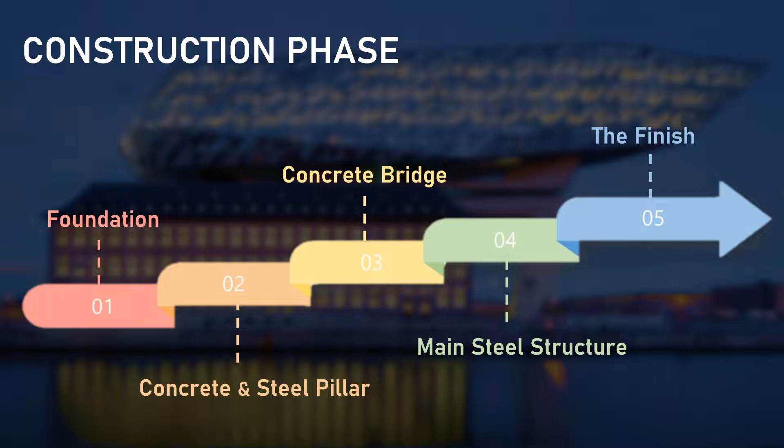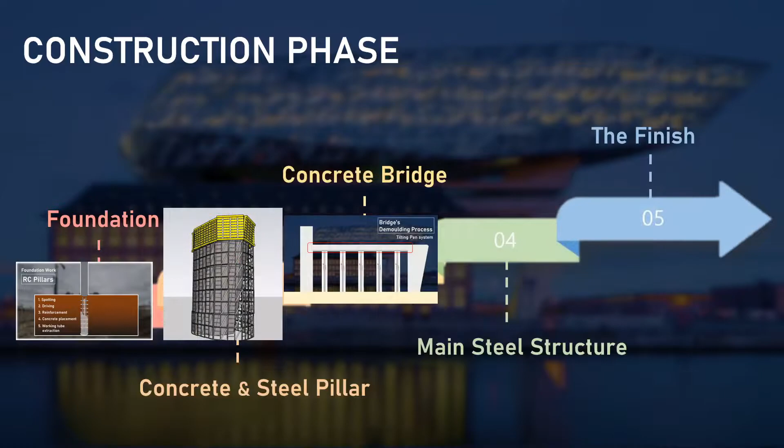Until today's video, we have covered most of the construction process of our building, Antwerp Port House, going all the way from the bottom to the highest point. Today we will go over the last process, the finish of Antwerp Port House, including its flooring and facade design and system.

First, let us go through how the floor was constructed in our main superstructure that floats above the ground. Before constructing the floor, there were three main challenges the contractor had to face, as the 1,500 tons of superstructure is floating above the ground with only a few pillars supporting its weight. To solve these challenges, the contractor focused on light weight, being free of temporary propping, and speed and ease of construction.

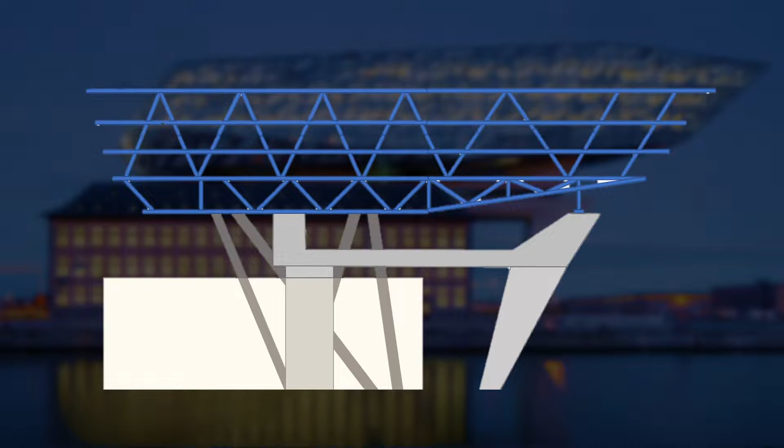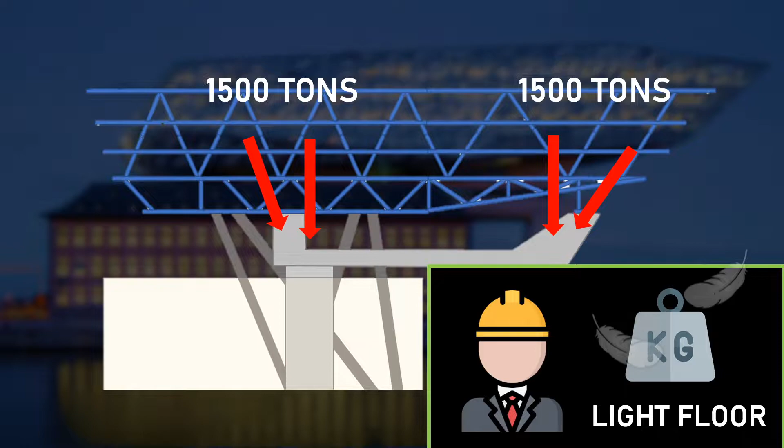As the superstructure itself was already a heavy structure, the contractor focused on using floor panels with low floor self-weight, which was important to limit the weight of the new building floating above the existing building.

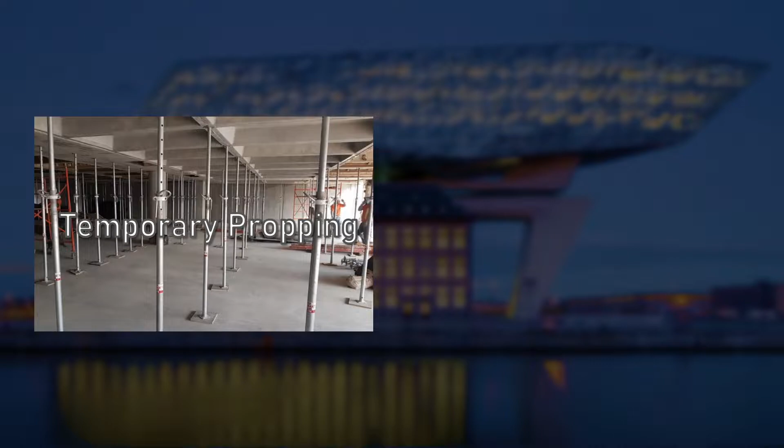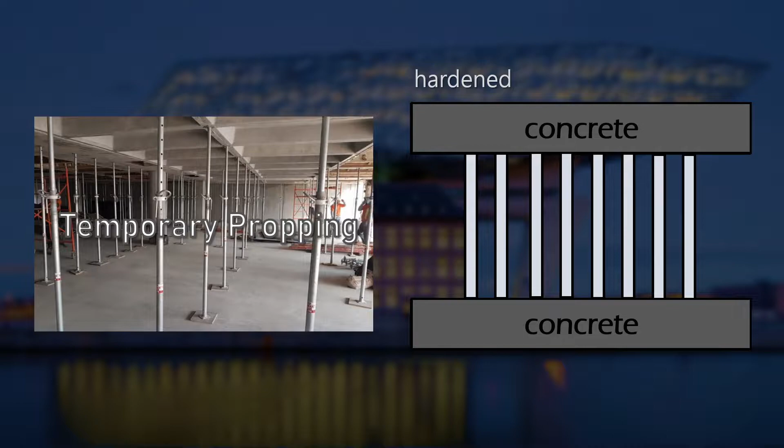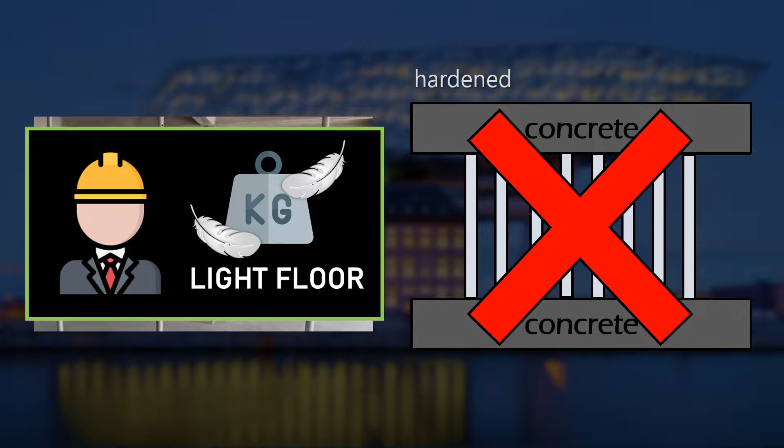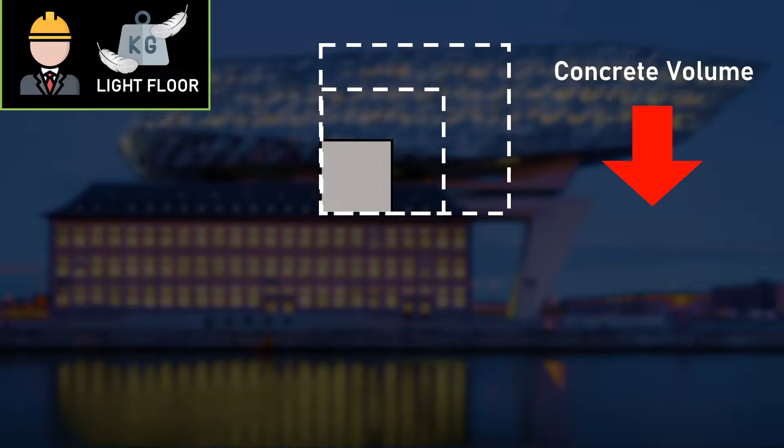In the process of creating a floor, temporary propping is used to properly shape the floor and support the concrete until it hardens. However, the contractor wanted to reduce unnecessary weight in constructing the floor. Therefore, they looked for floor panels that could achieve long spans and load requirements with no need for temporary propping. Finally, the contractor searched for a flooring system with low concrete volume, speed of construction, and high simplicity. All three elements focused on spending the lowest amount of weight possible in the flooring.

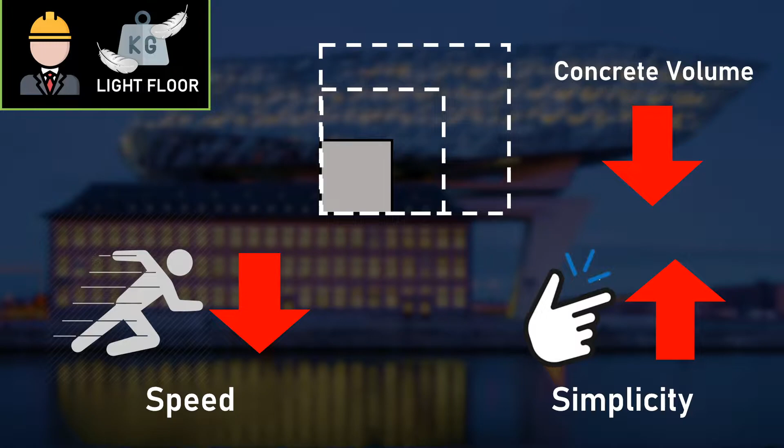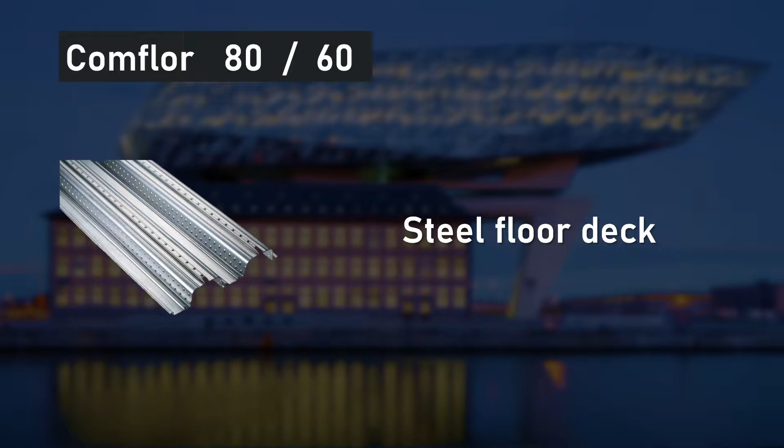To satisfy all three elements, Tata Steel Construction Company's ComFlor 80 and 60 were the perfect composite floor deck systems. These are the steel floor decks used in flooring in the Antwerp Port House, and the number at the end of the name represents the depth in millimeters of the trapezoidal profile, which gives an ability for long spans.

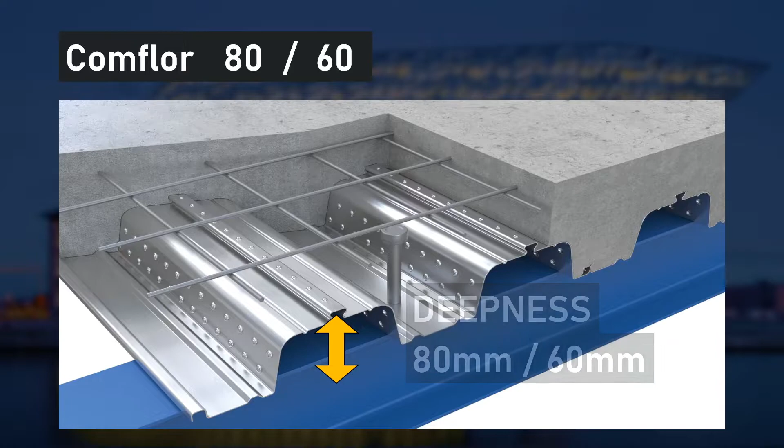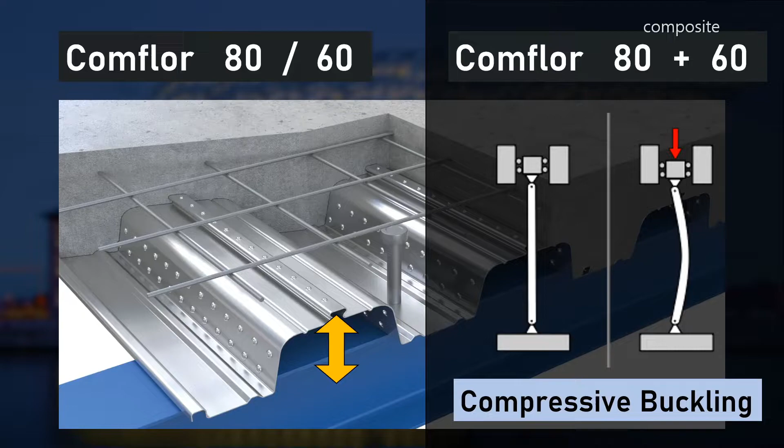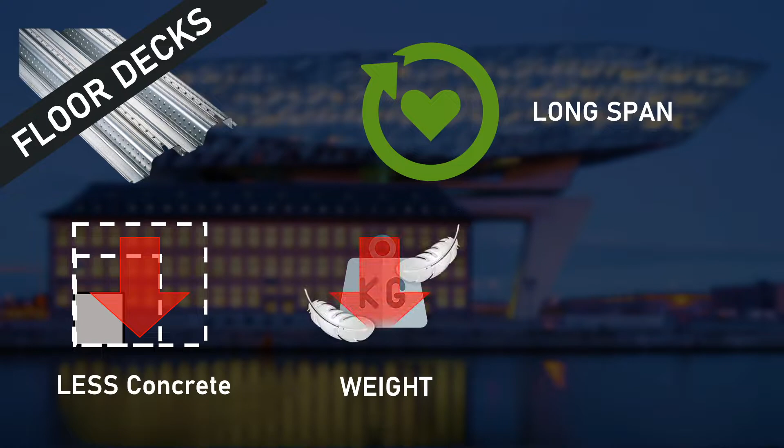Using these two composite floor deck systems, there is exceptional resistance to compressive buckling that could be created by the concrete, reducing the number of secondary beams needed to hold the deck. Through these two floor decks, the contractor of Antwerp Port House was able to solve challenges with benefits including long span, low concrete usage, low weight of the deck itself, and fewer beams needed to support the decks.

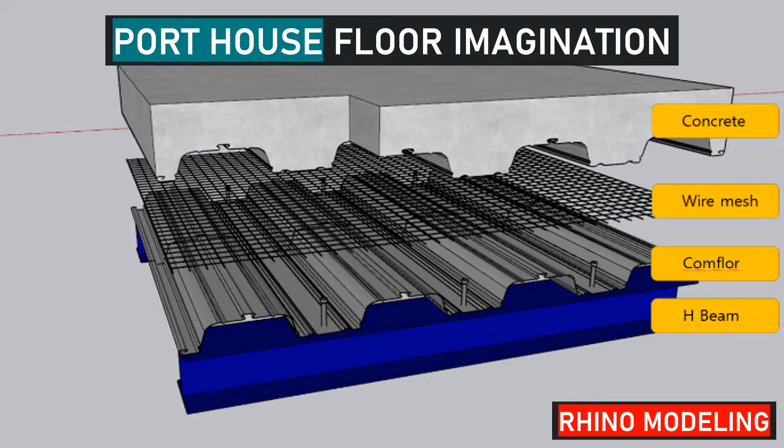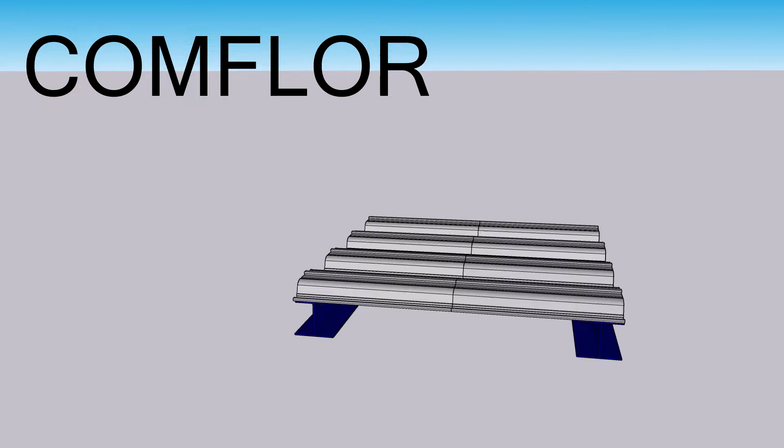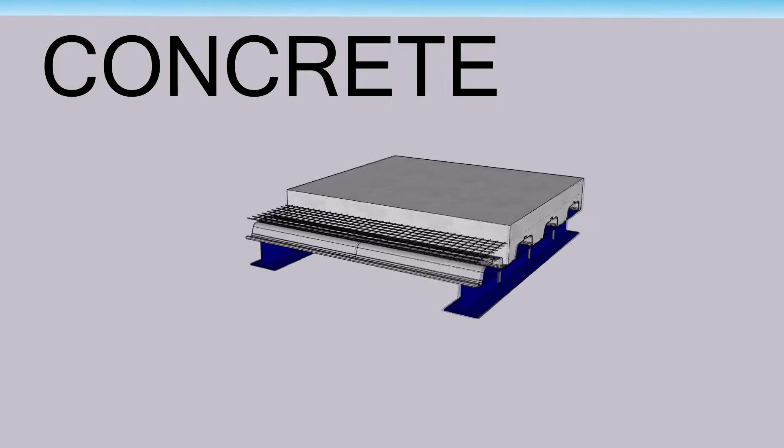This is the image we designed showing how the floor of Antwerp Port House is composed: ComFlor, wire mesh, and concrete, with an H-beam below. ComFlor is placed above the H-beam, pinned with a shear connector. Then wire mesh, which is steel, is placed above the ComFlor for reinforcement. Concrete is then poured, creating a reinforced concrete floor panel. This process is followed on each floor for the whole superstructure.

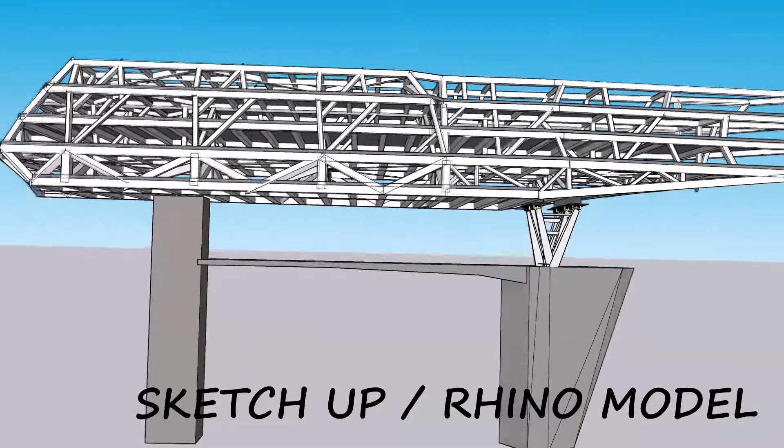Till now, we have covered how floor construction took place in our building, Antwerp Porthouse. Now we will go over how the facade was constructed.

Every side of the superstructure is covered with glass panels. The extreme geometries and parametric detailing of the structure have created aesthetic factors in Hadid's work, pointing due south toward the city's historic riverside and center. It seems both frozen in motion and surging forward.

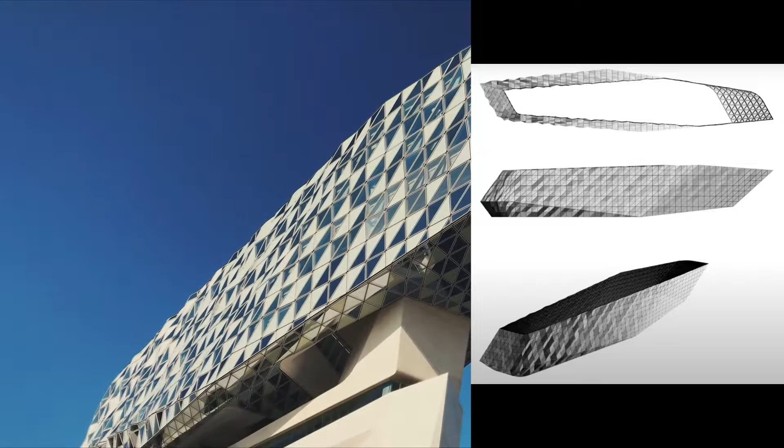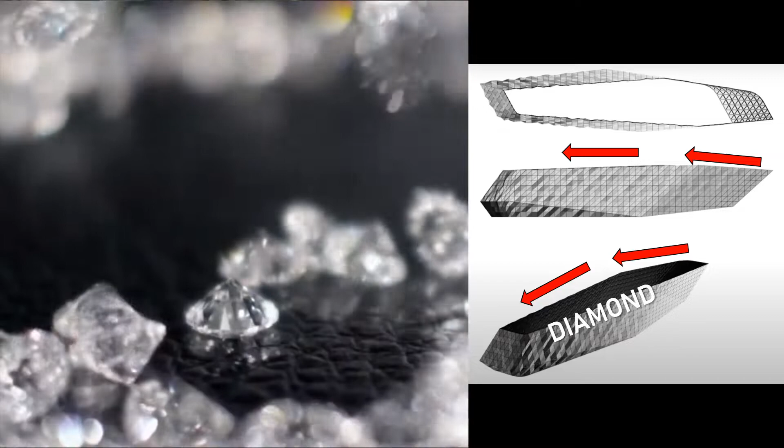The top's triangulated glazed cladding starts off flush at the prow but erupts into irregular projections, becoming increasingly crystalline along its length, a reference to Antwerp's famous diamond trade. The extension is covered in triangular facets, some transparent and others with a rippling texture that echoes the water to the north.

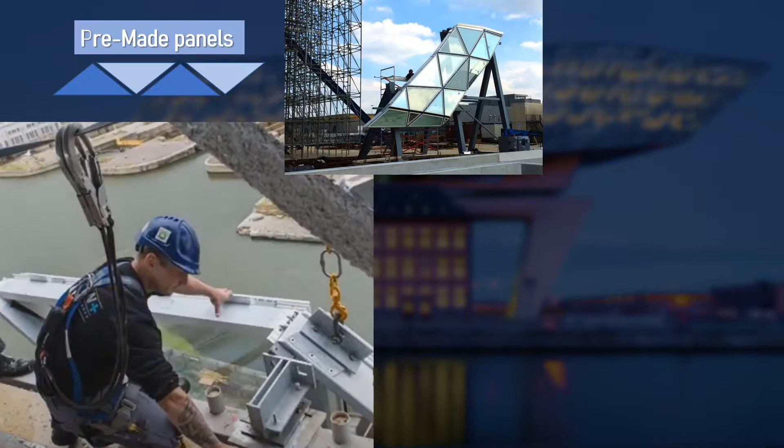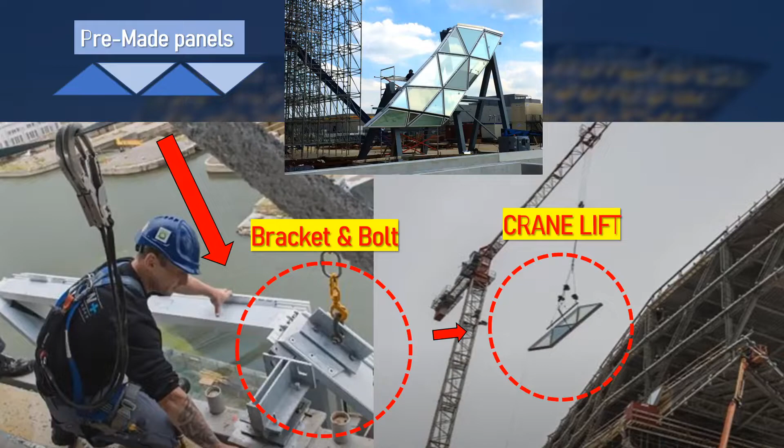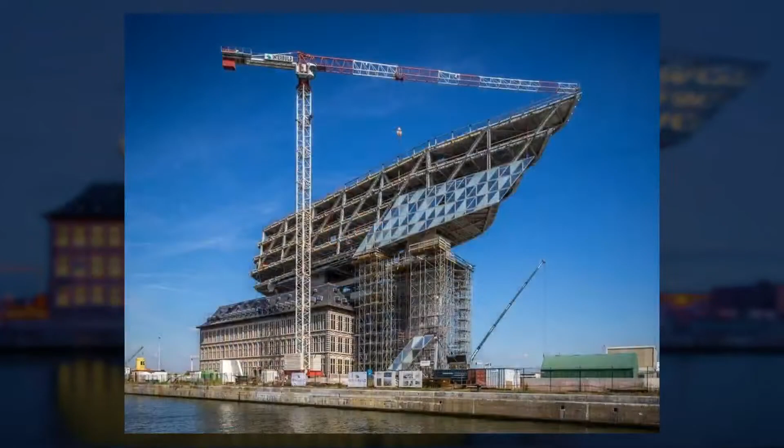Workers of the Antwerp Porthouse installed pre-made glass panels at the construction site, connecting them to the superstructure with bracket and bolt elements. Separate triangle panels were connected in a bundle with the same method and lifted to the superstructure's outer wall by a crane. By this method, the superstructure's outer wall was completely filled with glass panels from forward to backward.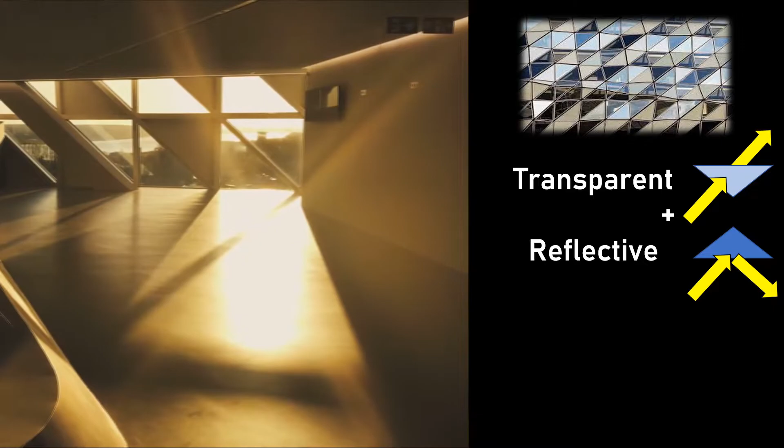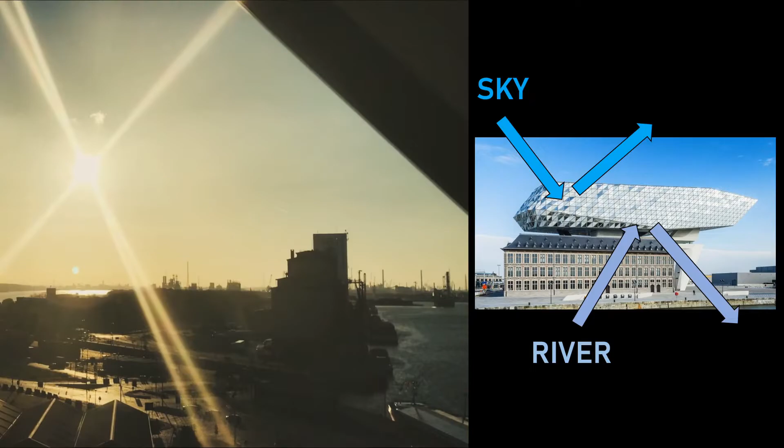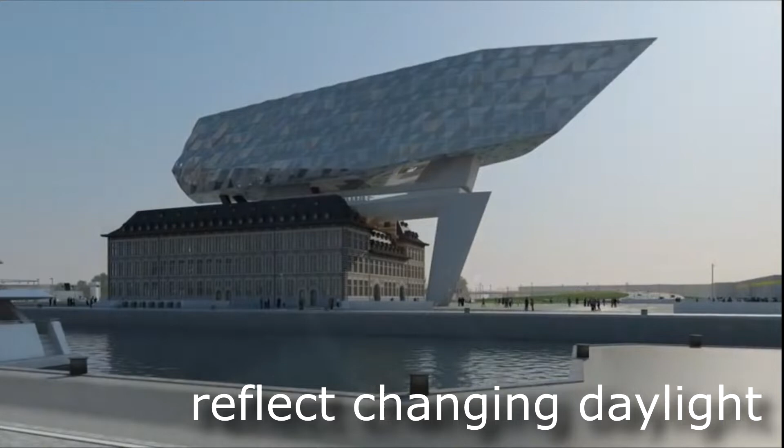The facade panels of the building contain a mix of transparent and reflective glass triangles. The alternating transparent and opaque panels are intended to visually break up the scale of the structure. They also provide ample daylight, shade, and views out to the Scheldt River, city, and port for workers. The new extension appears as a carefully cut form which changes its appearance with the shifting intensity of daylight. Like the ripples on the surface of the water in the surrounding port, the new facade reflects changing light conditions.

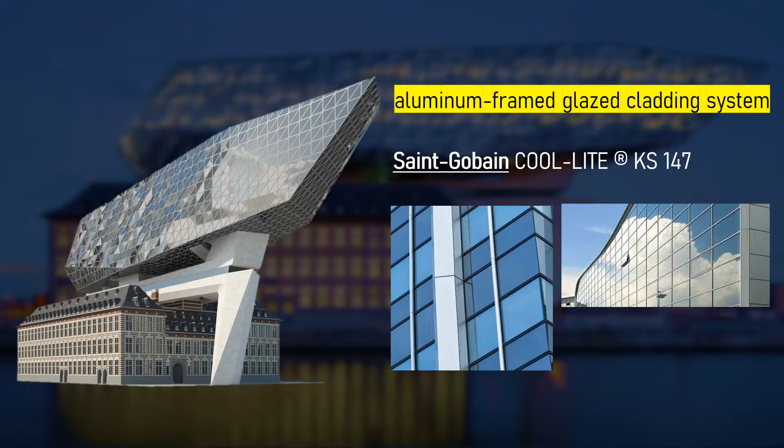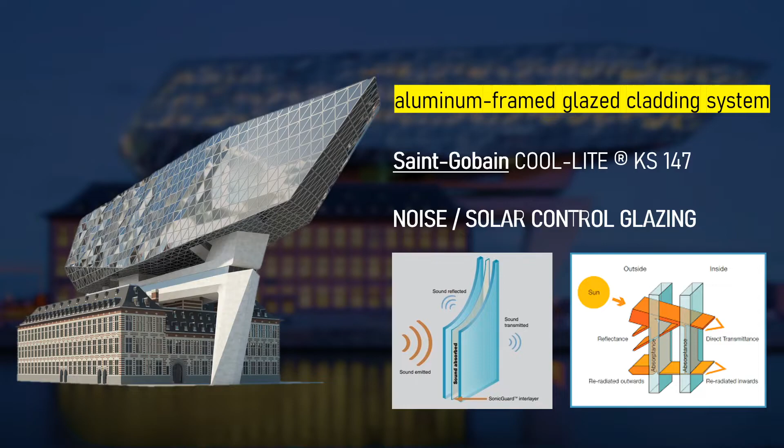The superstructure is wrapped in an aluminum-framed glazed cladding system, which reduces solar gain. The facade of the new extension consists of Saint-Gobain COOL-LITE KS 147 glazing. This modern noise control glazing keeps intrusive noise out, providing the tranquility essential for working and living, a benefit needed for the porthouse, combined with solar control glazing from the COOL-LITE range for providing multifunctional glazing options.

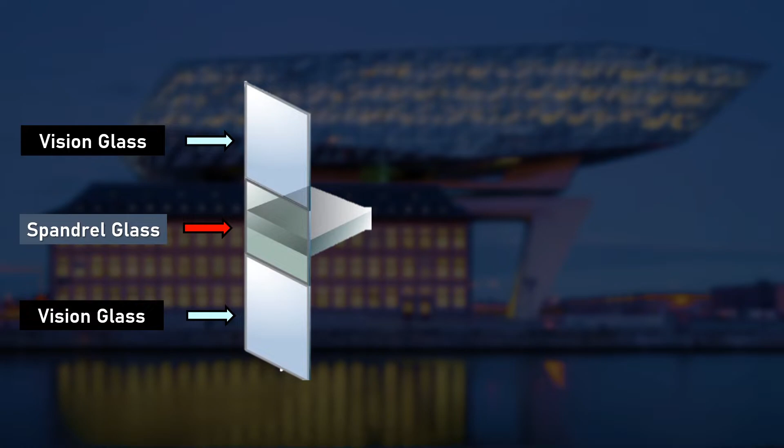When you look at the outside of the porthouse, you'll notice you can't see the floors, or the columns, or even the pipework. That's because the building was designed for us not to see those things. Spandrel glass was used to prevent materials or construction elements from being viewed from the exterior of the building.

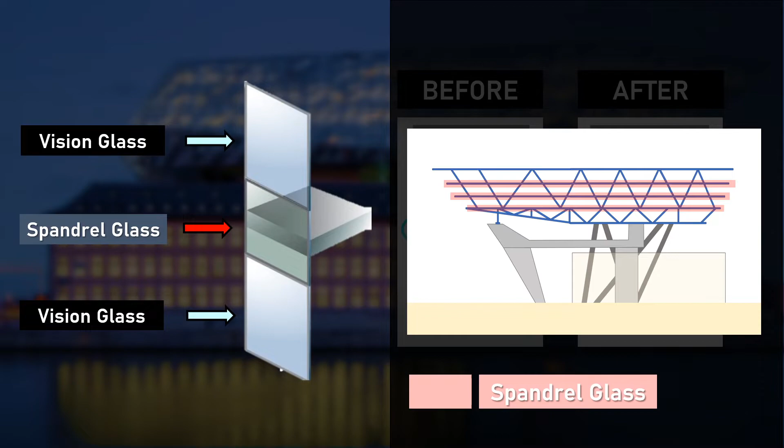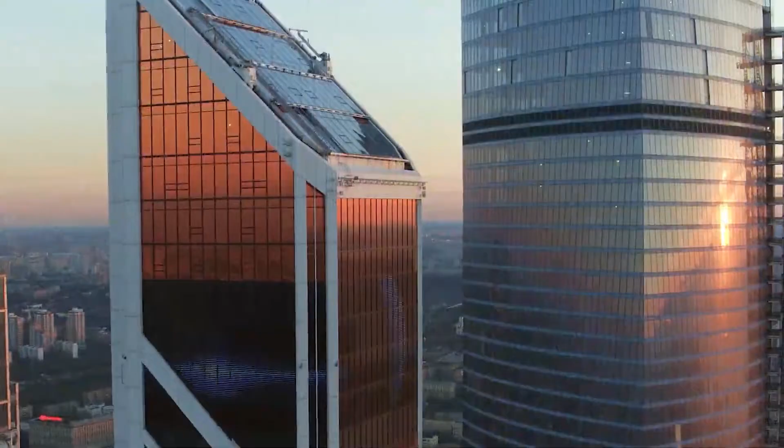Spandrel glass is the glass that lives in between the floors, made just like the other units, often with the same glass, but with a special coating or treatment to the back that prevents us from looking at it. Glass fabricators have different options and products available to them when making spandrel glass.

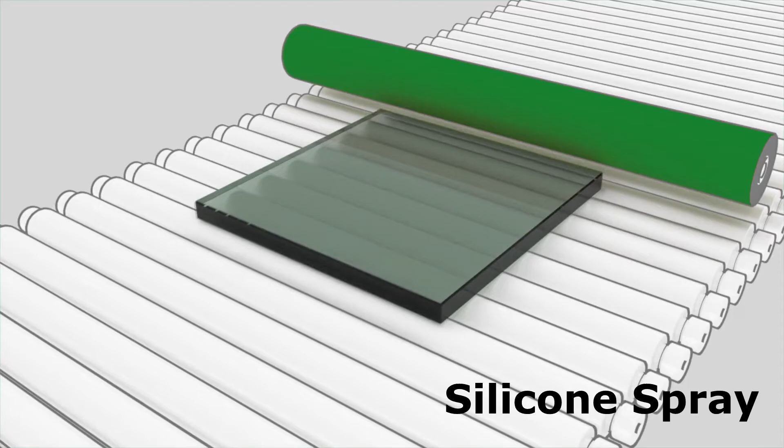One of the most common methods, as seen here, is applying a silicone spray to the back of the units. Spandrel glass can be designed to blend with the building, or it can be used to add a really cool look, but in the end, it's intended to hide all the not-so-pretty stuff.

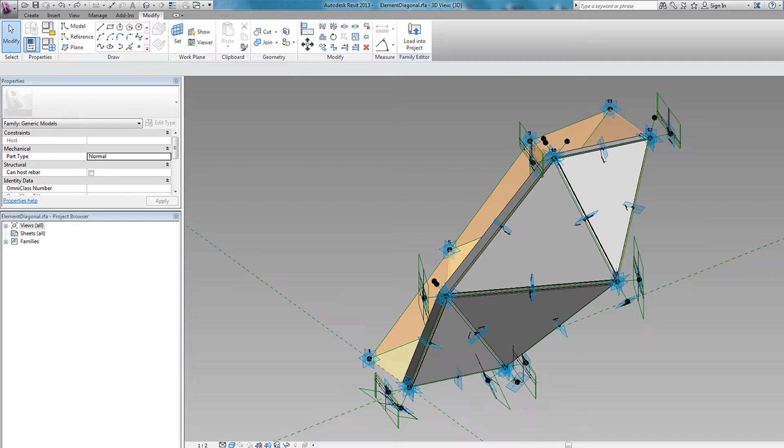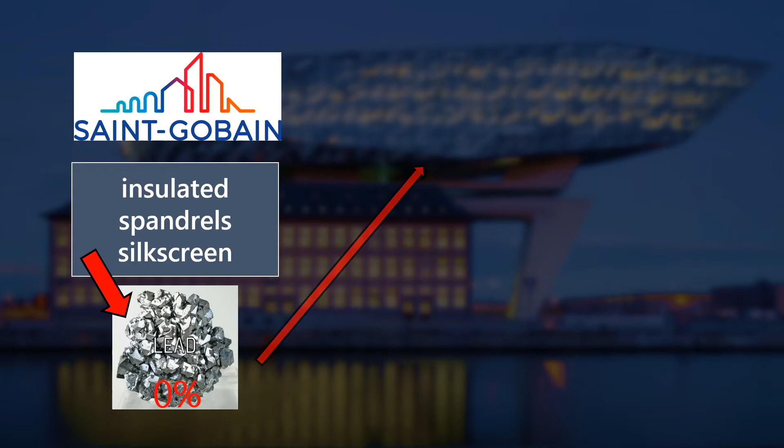And here's the beauty of it: because these units will never be visible or have lights behind them, they get away with a lot more flaws than any other units. Saint-Gobain provided insulated spandrel silk screen enamel with 0% lead. Saint-Gobain products contributed to the product obtaining BREEAM Very Good certification, meaning the product was very eco-friendly.